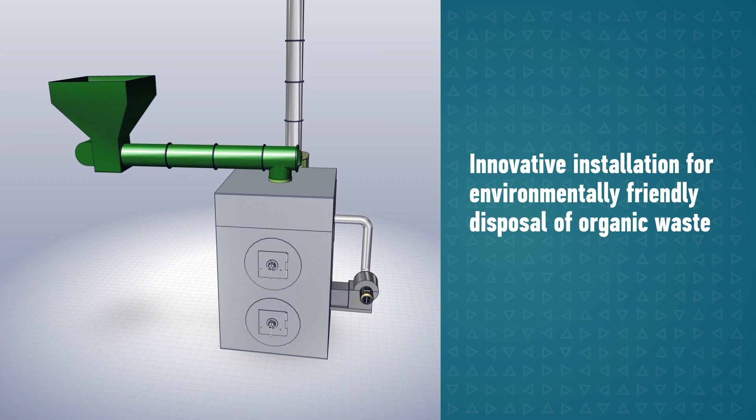Today, everyone, from residents of cities and villages to the head of a state, is aware about the problem of waste products and its importance. In 2018, the government adopted the strategy for the development of the industry of processing, recycling and neutralization of waste products until 2030 and approved a plan of measures for its implementation.

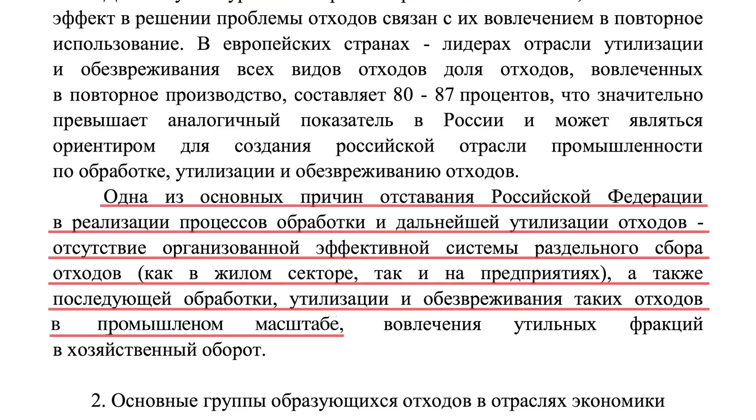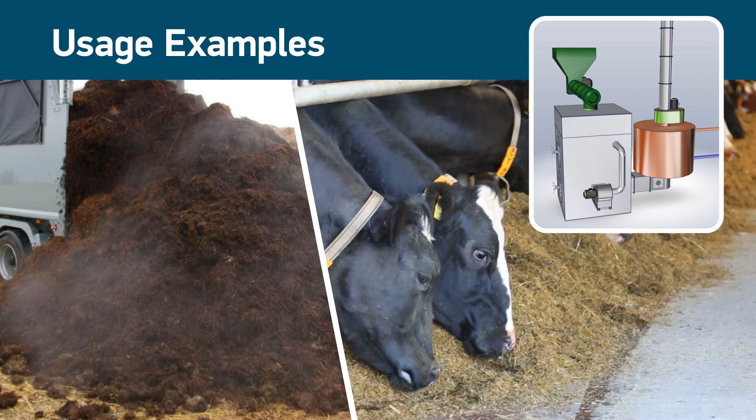This strategy focuses on industrial scale of collecting and recycling. We offer, if it's possible, to produce recycling on-site or even include it in the production cycle. This approach may be interesting and economically beneficial in different situations. First of all, it is suitable for enterprises producing organic waste, which is a high calorific fuel for the production of heat and electricity.

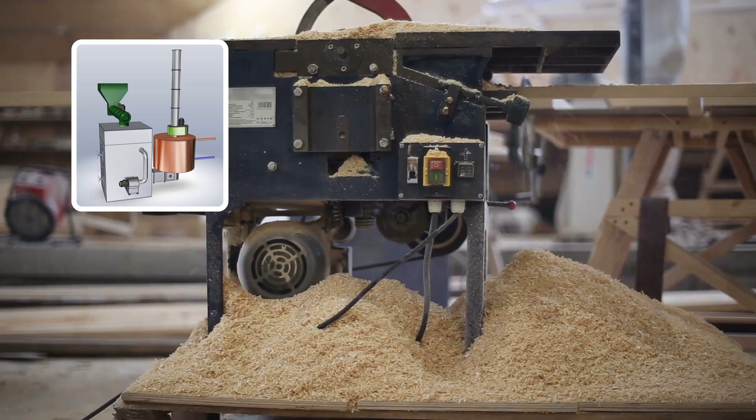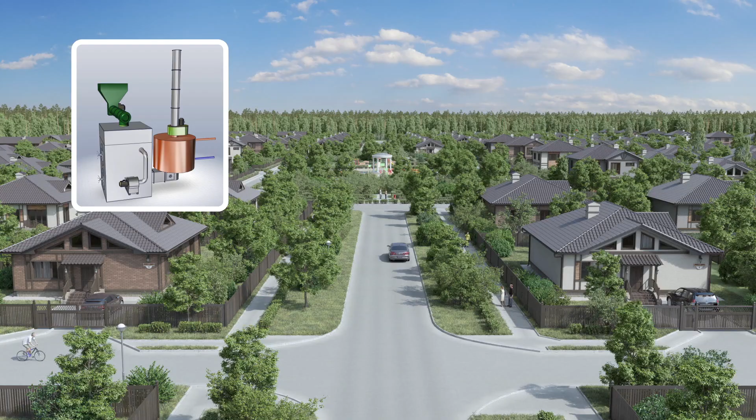How many megacalories and megajoules, and even more clearly, millions of dollars are thrown away into the landfill. Still, there are situations where the consumer does not have the opportunity to hand over waste for disposal, and how many problems can be resolved in the residential sector, especially in cottage settlements and small settlements, where the motivation for the residents is more clear.

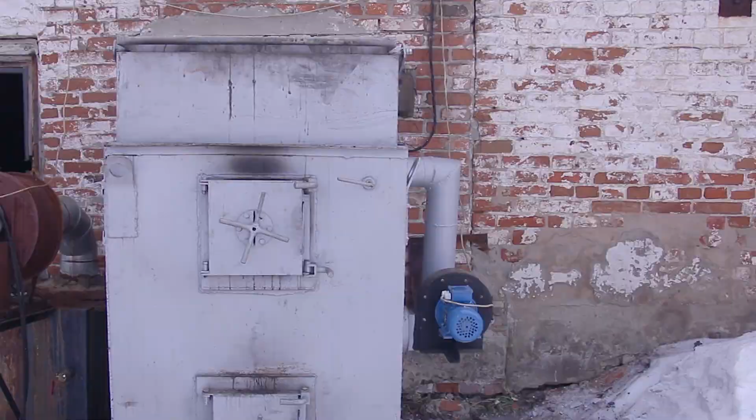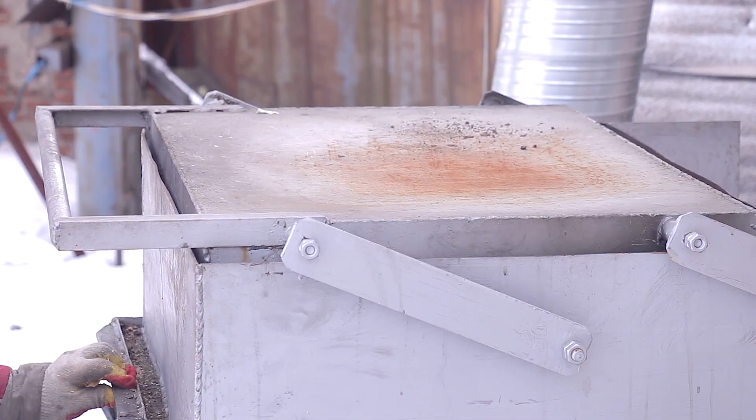In this presentation, we announce an innovative installation for environmentally friendly disposal and recycling of organic waste where such approach was applied. It is eco-friendly, economical, compact, easy to maintain. It can generate heat and electricity through additional equipment. And all of these are achieved by the uniqueness of technology and construction.

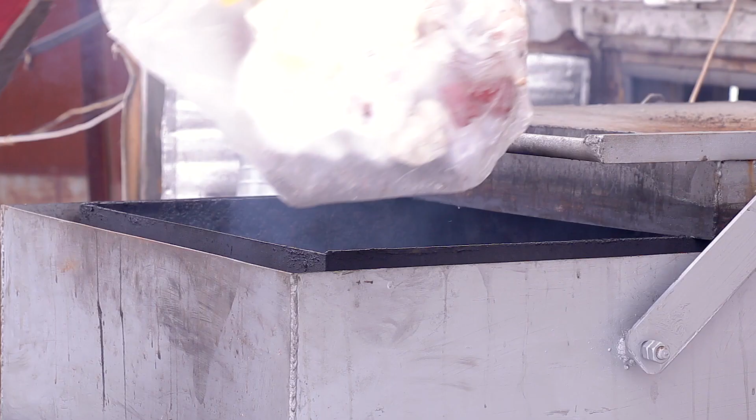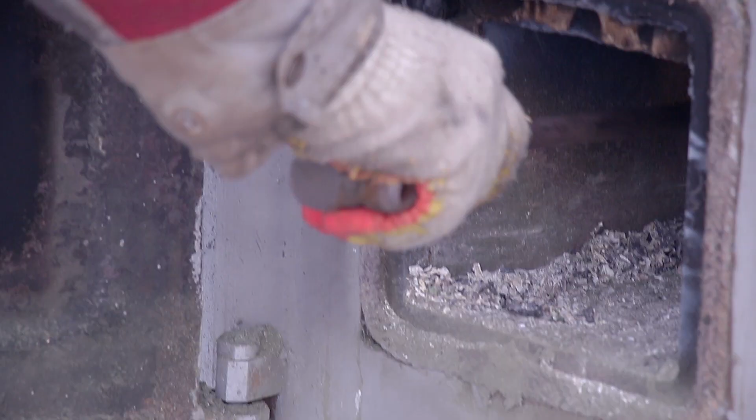Firstly, it does not need water and fuel from the outside. It works on self-sufficiency. Secondly, the waste processing is continuous. A new batch of raw materials is loaded without stopping the working process. Thirdly, the amount of mineral composition of the ash residue is 30 to 40 times less than the amount of waste, and it can go into secondary use.

Fourthly, the installation does not have expensive replaceable filters, while the percentage of all components in the outgoing gas is below the maximum permissible concentrations.

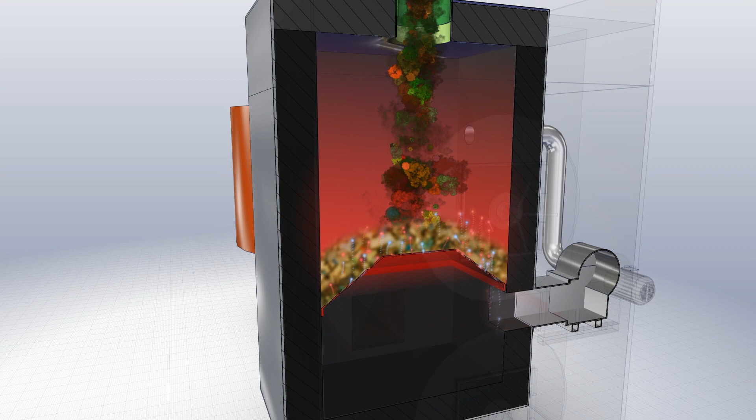The realized two-step technology of filtrating combustion in a super adiabatic regime was developed by experts of the Institute of Problems of Chemical Physics of the Russian Academy of Sciences far back in 2001. The innovation of the construction of the installation is that both steps go on it sequentially and in parallel at the same time, and provide in working volume the temperature of above 1200 degrees Celsius for longer than 2 seconds.

Such mode meets the requirements of the European standard and excludes the existence of harmful compounds in the outgoing gas in the form of dioxins.

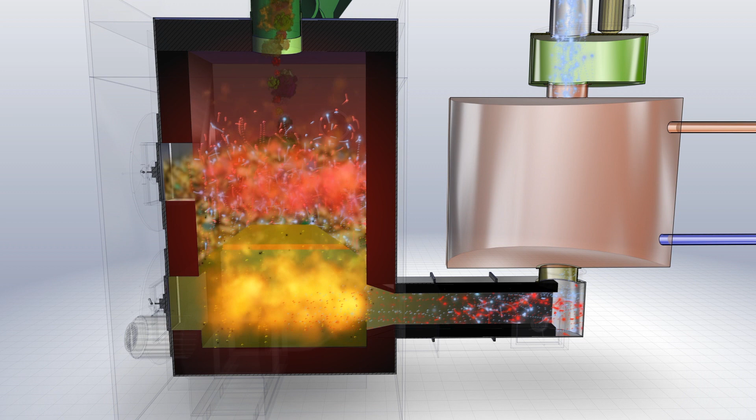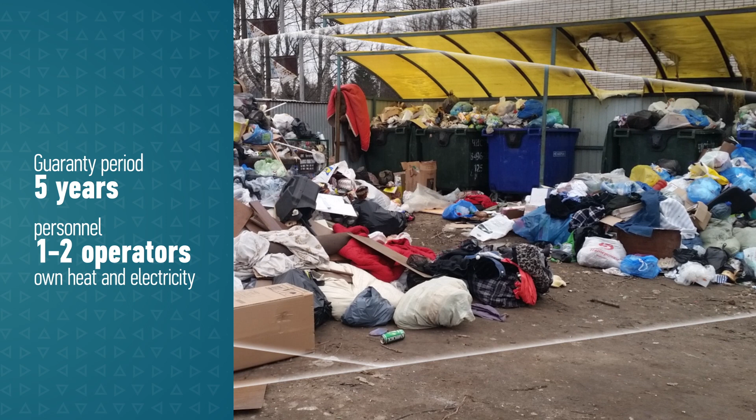We guarantee that with the correct exploitation, the installation will serve at least 5 years. The required personnel is 1 or 2 operators. The economy from waste disposal failure, the cost of purchased heat and electricity, and operators' wages are all you need to know for self-assessment of the effectiveness of purchasing the installation.

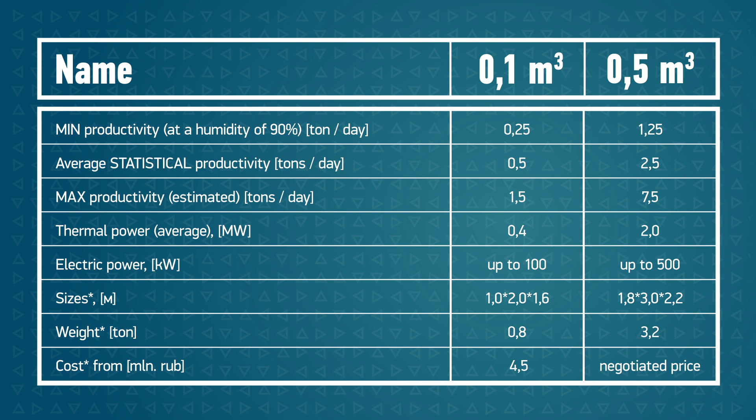And finally, nowadays we are ready to take orders for the production of the installations with a working volume of 0.1 to 0.5 cubic meters. The operational and price characteristics are given in the table. While ordering, you can agree on a definite volume of the installation, its design, automatization system, additional equipment and other conditions in conjunction with your production and other needs.

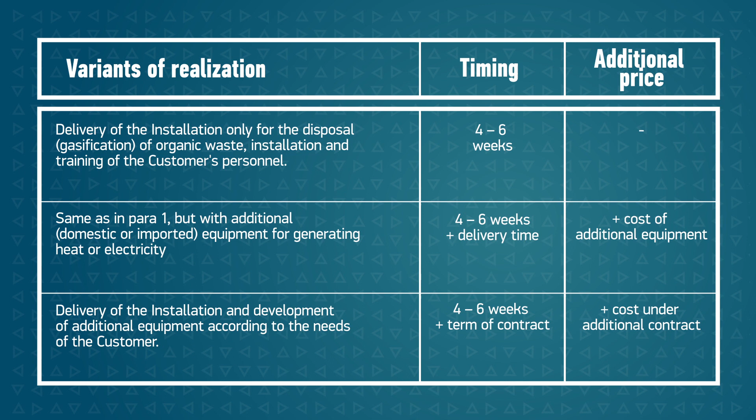The options of cooperation, as well as the implementation options that you see, can be very different. We are open to partnership.